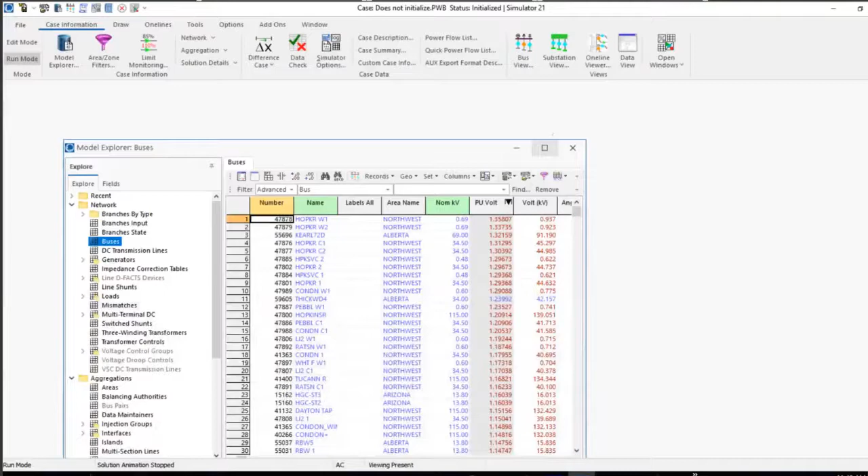This is what can happen. And let's just discuss, what do you do if we get this? What are the first steps that people do? For those of you who are just starting out with this, and you get tasked with running a system impact study-ish thing for some customer who wants to throw a generator on your 500 kV, you get a TS case. What's something that all of us do initially? Can you name off a couple of things that you have learned in your experience that you should do before you actually get into the guts of running a study?

So yeah, flat run, right? What is it? Who said that? What is that? 10 points.

What's that? No disturbance. Run it with no disturbance to make sure there's not things that are way out of limits or just bad, something that causes a wiggle. And then you've got to net out a bunch of generators that don't have models, and now I know there's a dashboard for this.

Right. So you run a flat line. You define a contingency with nothing in it, and you start it, and you plot some stuff. And what you want to see is just flat, and what you'll sometimes see is not that. So like Tom was saying yesterday, we all start ours at a second. I think Grid started theirs at like -1 second, and then they would kick the transient off at 0, right? I never understood.

Which was different, but it still gives you a second of a gap, which is also really best practice. Make sure you put a second or so before your fault so you can see, did this case have any issues before you got started, right? Another thing when you do a flat line is sometimes you'll get plots that are crazy, I won't show it here, because PowerWorld auto scales.

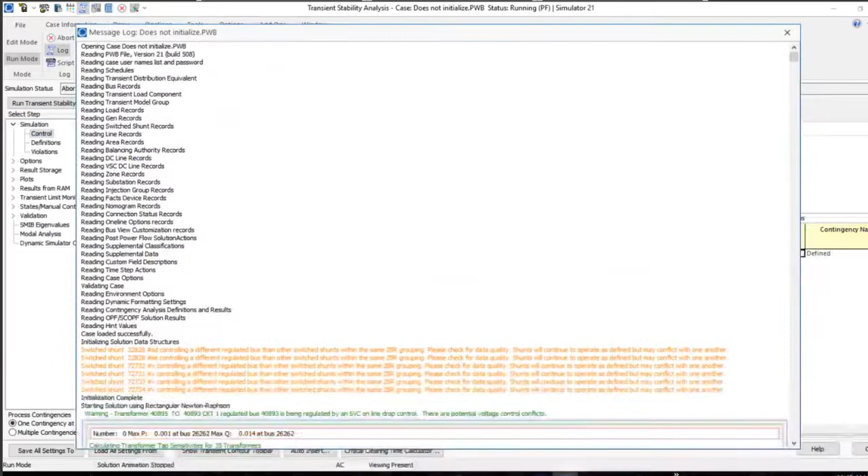But in the log, I'm a big fan of the log. You should become big fans of the log. You don't get a whole lot, I'll make that bigger, other than it was really unhappy. On the status bar, I don't know why these are sometimes disconnected, but they are. Sometimes these don't show up in the log.

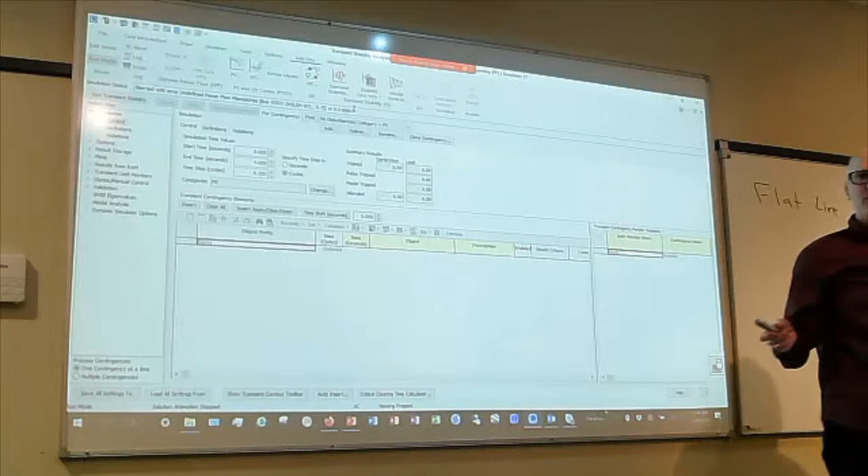This text. Correct, that won't necessarily show. So if you've not paid attention to this little bar up here, for this particular case, this is where the action is, because it's not in the log. Even though it's all been validated and run, the case won't initialize, there's something funny with this case. So if you had this, what would you do? Experienced planners, what might you do?

Yeah, go to the bus, right? Let's go. So wind turbine. Well, it's Wild Horse, right? Anybody ever had Wild Horse freak a case out? Okay. Honest to God, it's happened more than once. There's a wind plant on the line in Montana.

What is that? No disrespect to, where's the camera? No disrespect to you guys, but Glacier Wind. There's a wind plant called Glacier Wind, and gosh dang it, that model, for whatever reason, can unzip a WECC case. Like it can punt Alberta, we've had that thing just freak out.

And as planners, I don't know what to do with those parameters, so I just disable the whole model. Right? That's what I can do. Because me going in there and changing it, let's say their inertia is just some mad number. Well, I know what inertia is, but it's no better when I changed it than it was in the first place, to be honest. So there's nothing wrong with punting that stuff. But this one's a good one, because this actually happens. So 42372, let's mosey on over.

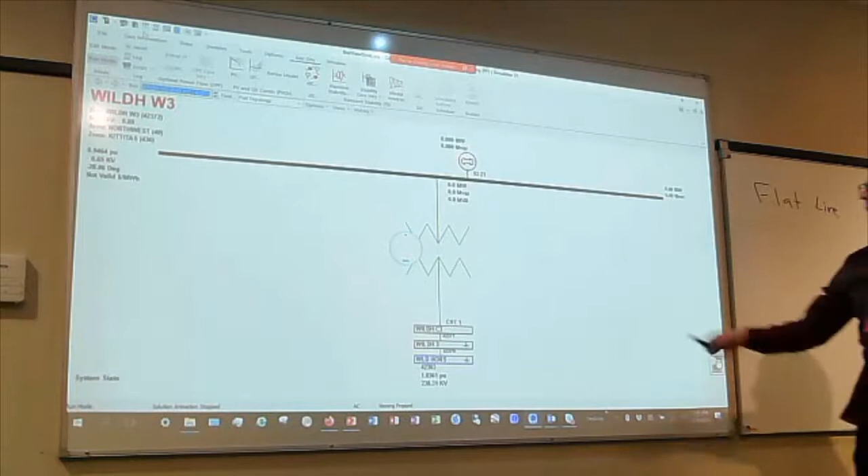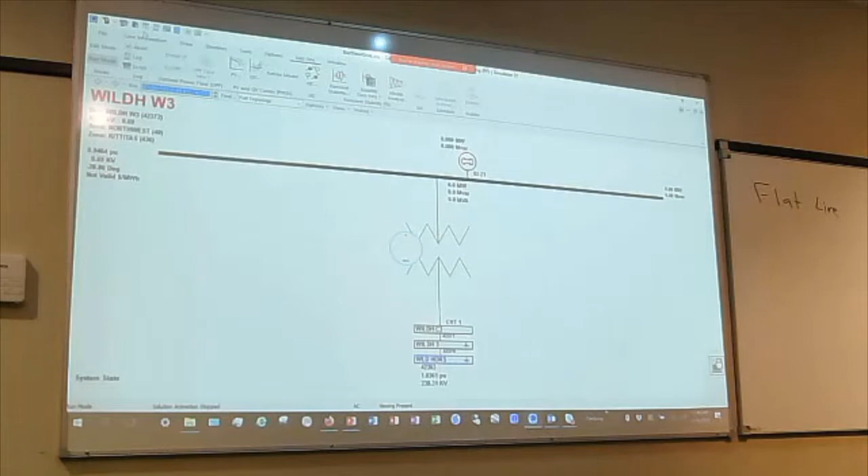So I've learned this is sometimes bad, that a generator is online and it's sitting at 0, right? The software should catch this if it's a problem. I'm gonna write this down. You're right, it could cause numerical problems. Well, that happens, and as you go, you'll learn this stuff.

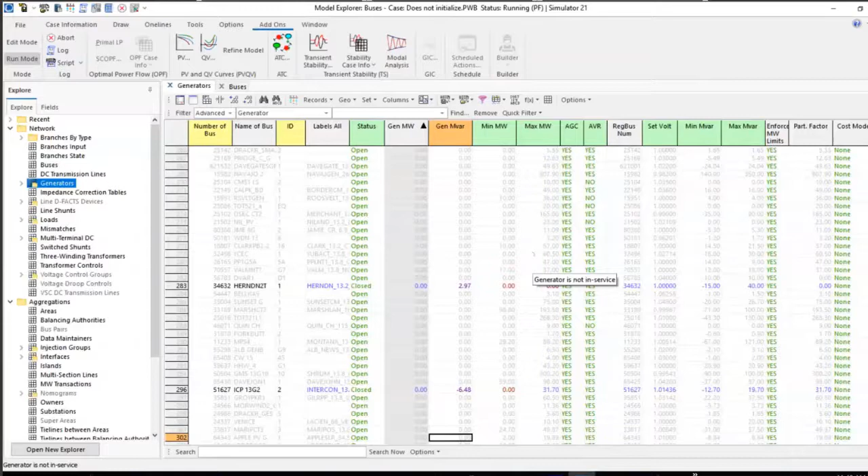We go to generators, we go sort on megawatt, and if we get out of the whole open area, there's a number that are at 0 and that are on. Now, the software people, why is that a big deal? It's a big deal in this case because this is the problem. Go ahead. The not-a-number stuff can happen in the numerical calculation. Something ends up being 0 divided by 0, and that's probably what's going on.

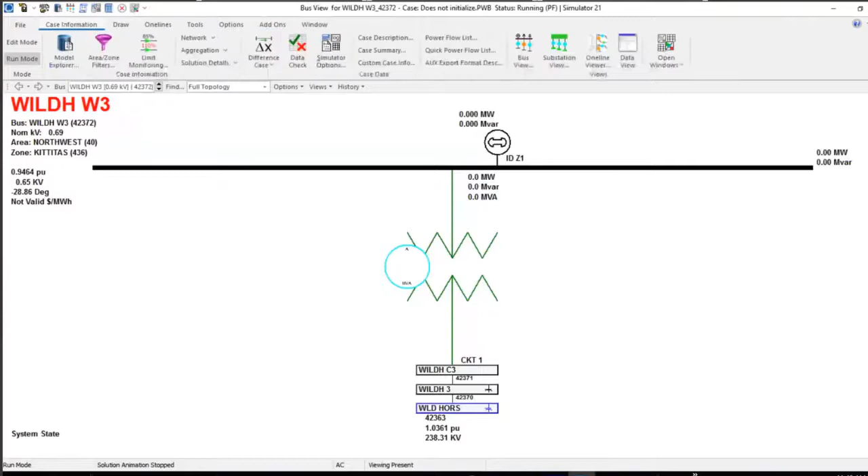It's a bug in the software ultimately. So send me this case and hopefully we'll handle it more gracefully. But that's the kind of error where you get undefined power mismatch. That's what's going on. But what if it was a synchronous condenser? Well, it wouldn't normally be at, I mean, the point is we need to capture. It's at 0 though. Would a synchronous condenser be at 0? Yeah, I think for power it would be 0, but it could generate VAR. So anyway, there's something in the equation.

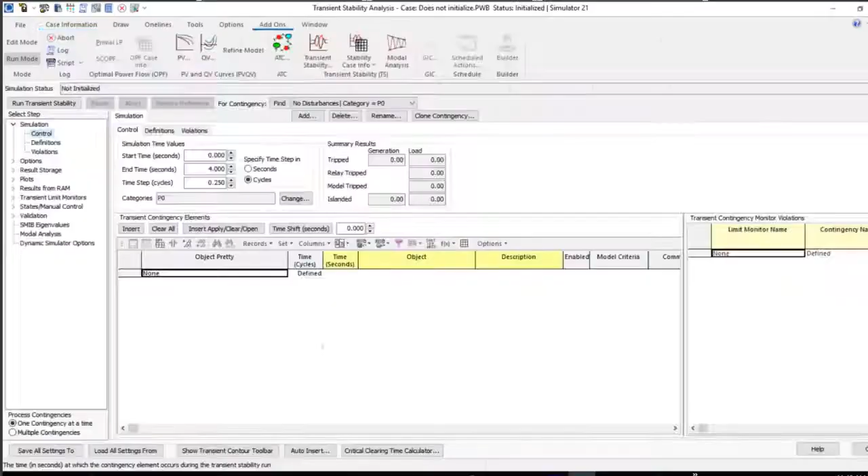So, 2021 Light Spring 1, that's the one that punted. So, what do you do? I would go look at the generator. I just wanna bring up another point: not just zero, but when we run transient on the real-time cases, condensing doesn't work either. You have to turn those models on. And there's a lot in the real-time cases where there's zero connected, and that'll cause problems.

In the case of light spring, could the wind be blowing? It could, but as a planner, I want to use this case. This is a public approved case, a WECC approved case. For this one, I would open up the generator and the feeder network and then close them in one at a time to see. One option is just open it, right? And then, good enough option.

And then we roll over to stability and try it again. And I think this one fails again, because all the Wild Horse is unhappy. Wild Horse wind plant. I think it's gonna punt, yeah. 42, 367. STATCOM model, the problem.

Jamie, I have a question. I'm kind of doing the same thing that he's doing, and I am grabbing some errors here. I have to go to the bus view and then type in the number. Is there a way to right-click and go to any bus? Unless you're in the case information, you can't. In an edit box like that, there's not. We could, but we'd have to code it on every little number edit box, whereas in the case interface, it's all kind of built in.

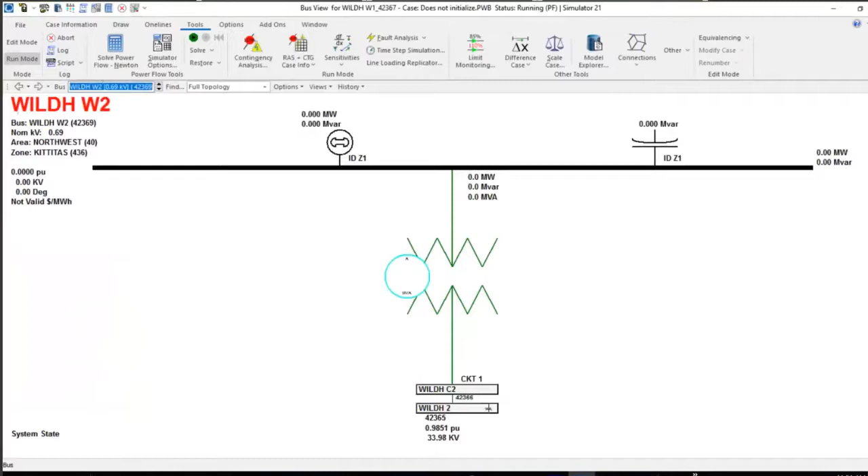369. So right now it's hopping around. All the Wild Horse issues, it looks like. So can you open that generator and show me what machine model is there? Open up. It's an induction motor model. And the cool thing is, this is not an old case, right? Can you initialize an induction motor at zero? It said it was built 2017.

Well, it's not terribly old. I would never use this case. Oh, no, I saved this case because in my time as a planner, I wish I would've saved all of them that I got from WECC. I looked back, I've had some issues with some cases, so I just pulled these ones, but these were published cases. It was published in 2017, but it was an honest-to-goodness case that was built for us to run studies on.

And sometimes it's a translation between GE and PowerWorld. I've had that happen. I had Simrit send me a couple cases, a coworker, she's at PG&E, that didn't work. They weren't well behaved in GE, and I loaded them up in PowerWorld, and they're well behaved. And I know that we learned a long time ago there was some initializing of some generator current that was done differently in GE and PowerWorld.

And initially, the folks at GE said, well, PowerWorld's doing it wrong. And I think you worked with some older gentleman at MVWG, and we found out they're different, but they're both legit. And in this particular instance, between GE and PowerWorld, one of them just refused to initialize. And you're the one sitting there doing this stuff.

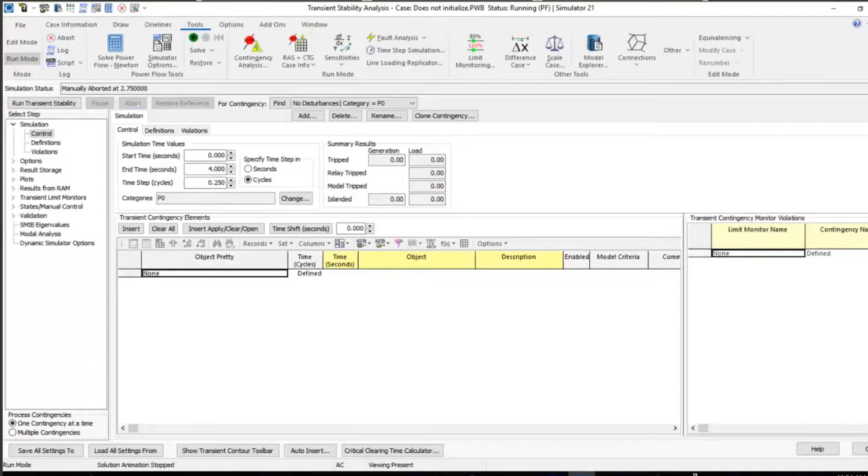Yeah. It is, okay. Because I think our grid modeling group has decided all the wind plants should be turned on at about 30% at a minimum, so that we can flatline test the cases and get these wind models better.

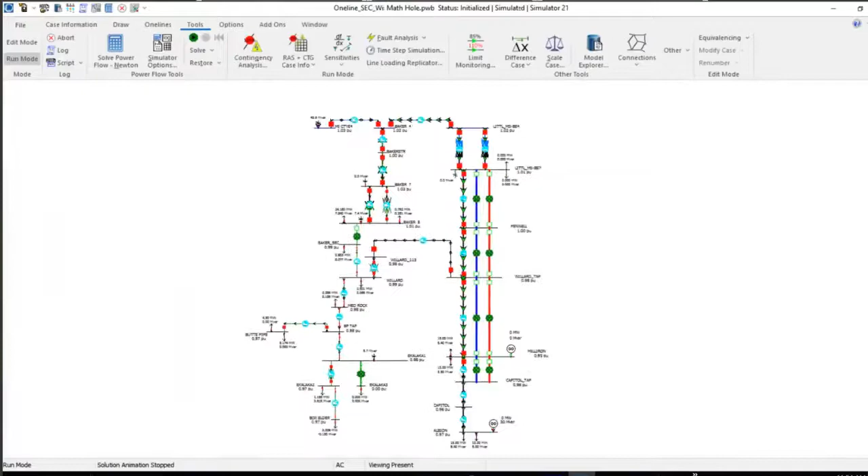Well, when in doubt, at least for me, I'm sure you have a lot of senior study people here that you can probably go to. I'm guessing that hopefully happens a lot, because good grief, in this room, you've likely seen everything as far as what a case can do. But I have found Mark at PowerWorld, he'll get my email, and he'll ship it off to somebody, and they'll help you out. If you've expended yourself on trying to get a dang case to function, I'm not saying blow up a bunch of emails, but they are quite helpful.

Yeah, I always tell our customers that a lot of our power engineering brethren are pretty passive people, most of us in this room. And most of you are afraid to bother me. And so you don't tell me when things are broken. So I tell you, for the sake of all those other people who will never email me, get us to fix it so that they don't have to be in the same boat as you. You know what I mean?

Support at powerworld.com is your good friend, or email Caroline or me. And you've met Caroline, she doesn't package anything. She's kind of direct, like, look, it hurts a little bit, but you get going.

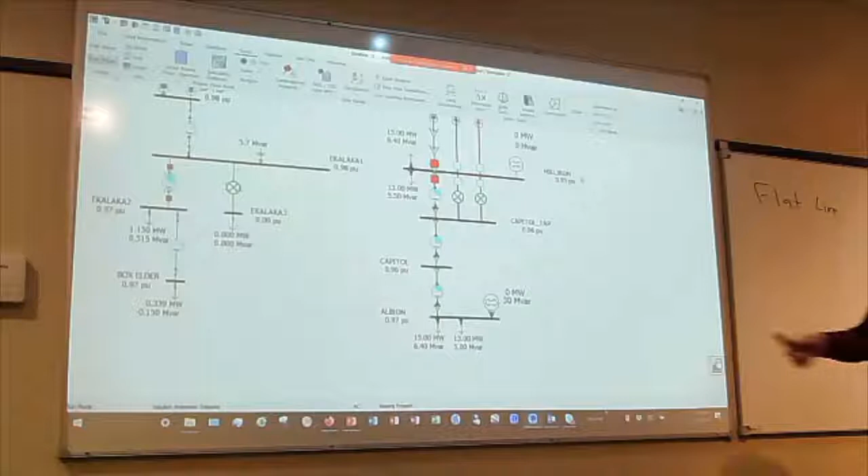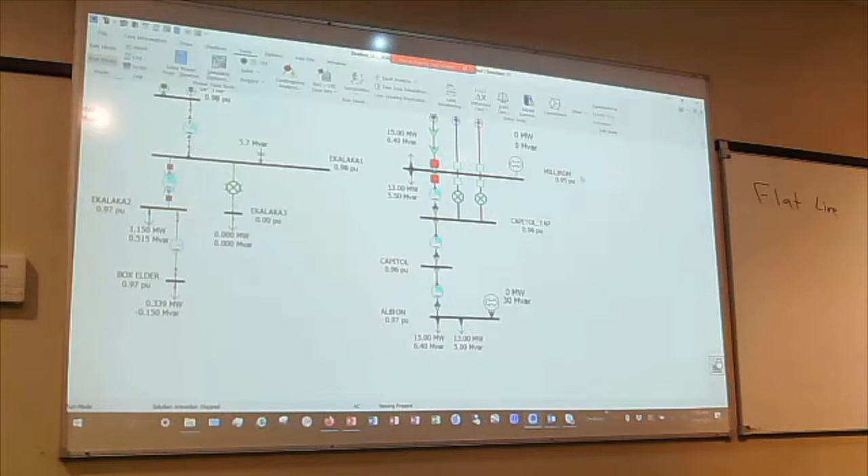Right, here's a funky one. This case worked one day and not the next, and I did send this one to PowerWorld. Sometimes when I'm lazy, I'll use a generator instead of a cap to figure out how much capacitance I need there. I mean, the QV curves are always short because the volts are always low, but maybe it's a bad practice. I did it this time because the client was trying to figure out the cheapest way to put a cap back.

So sometimes I'll just go to edit mode, and if you didn't know this, you can go to edit mode and drag this thing over here, and PowerWorld will say, hey, you want to move it? I'll say yeah. And this time I just put one of each, and it lost its mind. This one's kind of exciting, because I still don't know what the deal is here, but two things can happen. Let's look at the log, because this was a solving case until a moment, and I'm not doing anything weird here.

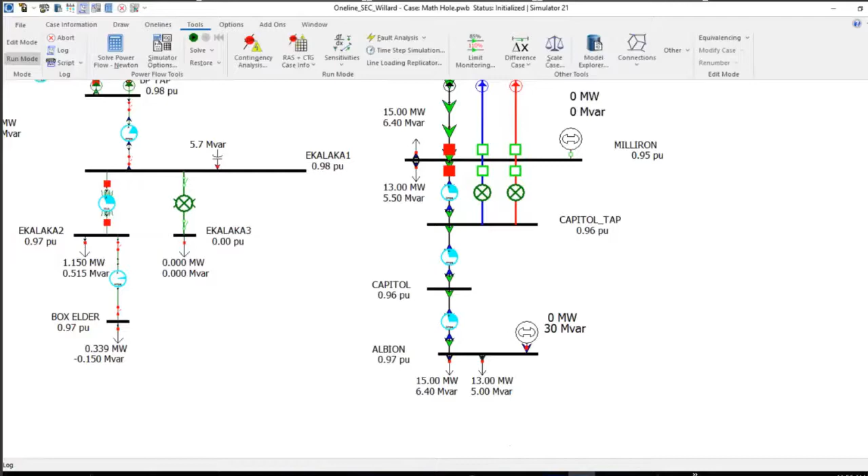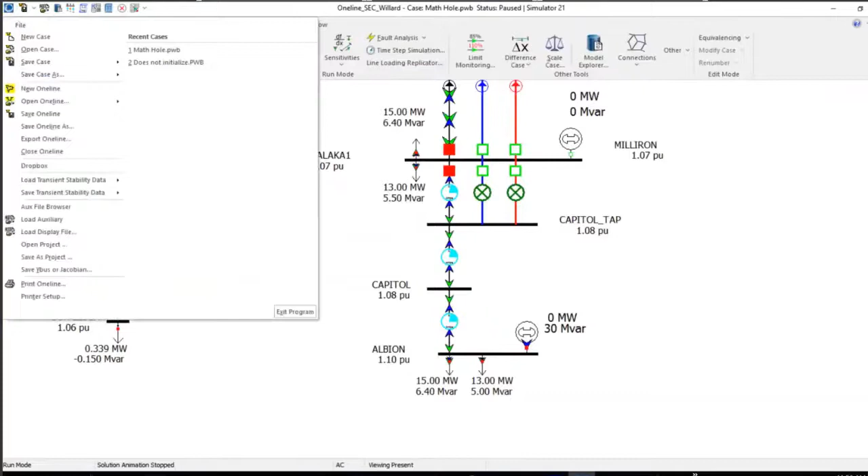Go to solve it, and, oh, for crying, there we go. It will progressively get worse, okay? To the point where the power flow did not converge, right? So here's a good one. Just for our edification, we'll open this up again, simple thing, I'm gonna solve it once. Here's the tricky part: I'm gonna open this thing, because this is where the issue is.

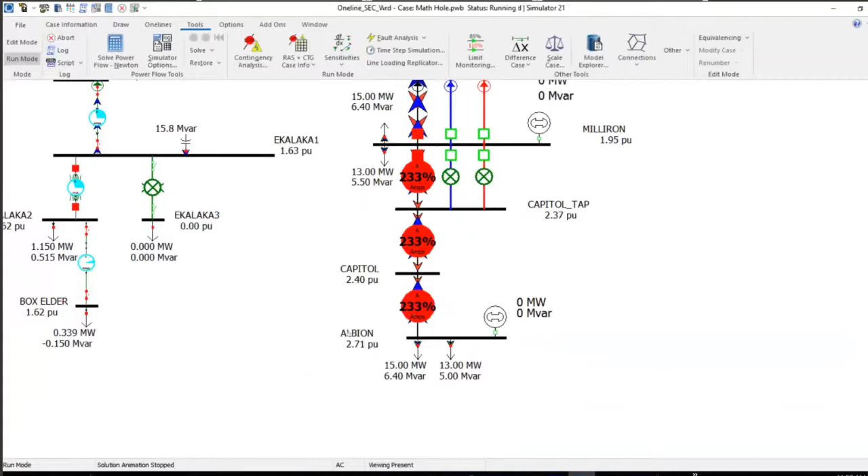And I'm gonna solve it, and all of a sudden, I get megawatts from nowhere, and a 2.7 per unit. Right? Hey, wait, send me that case. I was way confused about this one. Yeah, just send it to me, Colin. Right when you get done, as we go to lunch, send it to me, I'll look at it.

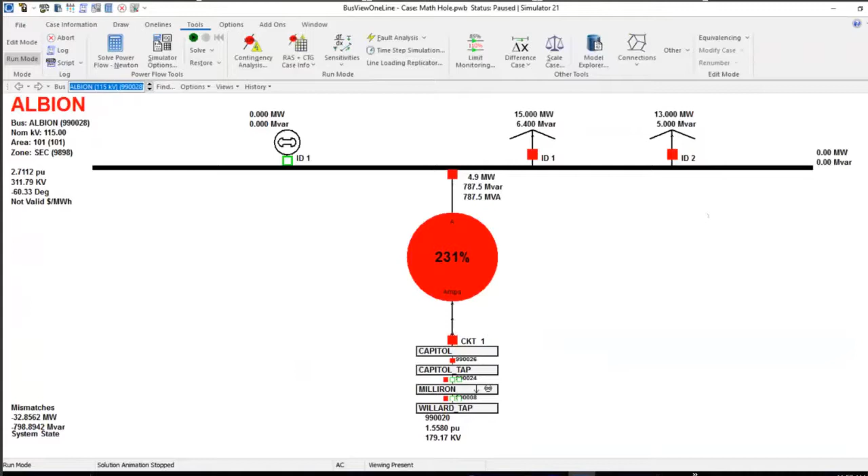Yeah. You'll get this, and that's why you save often. If you're new to studies and you make a change, save that case out as something else, because sometimes there's no way to get back. Like this version right here, I have tried something you can often do: you can go way up and open everything up, and then just try to bring it back, right?

But this particular line, I've never seen a QV curve with the bottom so close, it just has no reactive margin. So that could partially be it, but I couldn't get this back. I had to start over, because something happened so badly in the math that I couldn't get it to work enough to even get stability started. In a lot of our state estimator cases, when we pull one, take outages and solve, sometimes you just get tons of megawatts or vars going every which direction, it makes zero sense, and I just close it and start over.

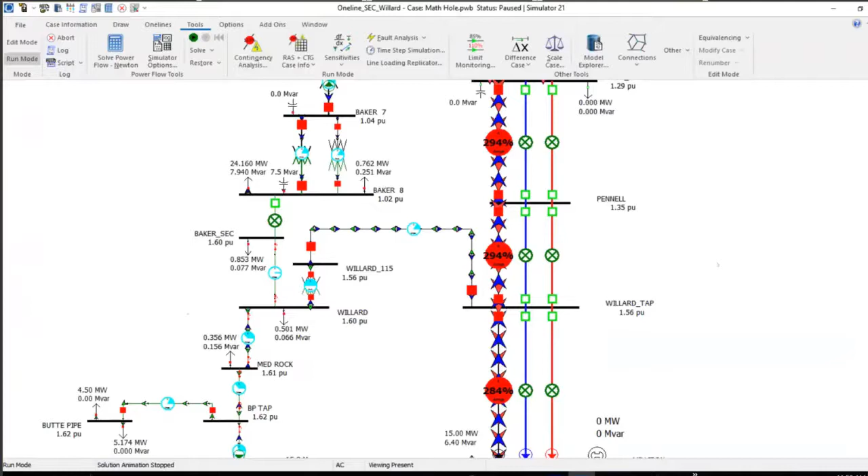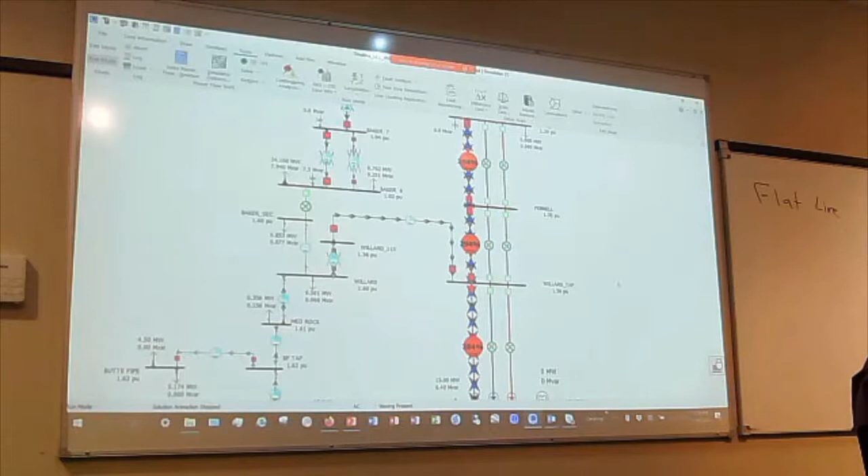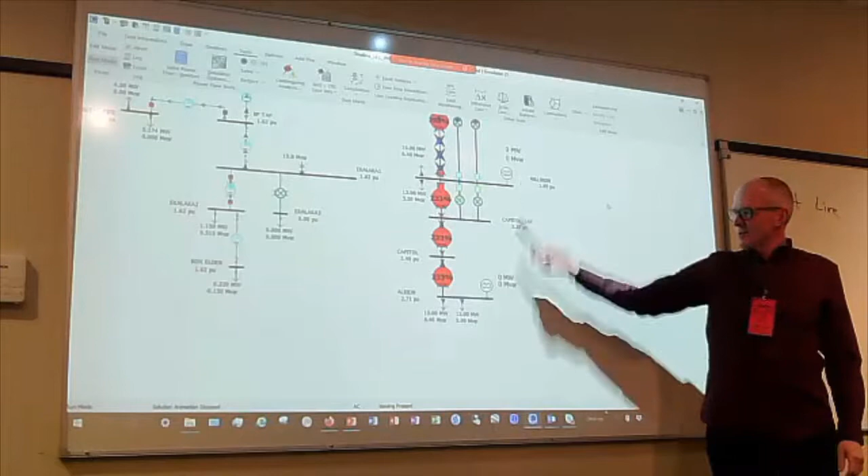Yeah, and I saved this one because I got a good one for someday. I didn't know why, and it could have been that I used this generator to regulate. That's why I was wondering what's the regulation. They were never both on at the same time. I would use this one to regulate this bus to 0.95 and see how that worked, then open this one up, turn this one on, use it to regulate to 0.95, and see who was needing more. And there could be a large impedance, but they were never on at the same time.

And then we get this where I turn them both off, and all of a sudden I'm getting magic megawatts. And this was also a published case. I'm like, well, gosh dang it. Now this is something I did. Granted, I added a generator there, but it seemed not so terrible. And you'll find that. So that's another way. We've saved cases before, not in this one.

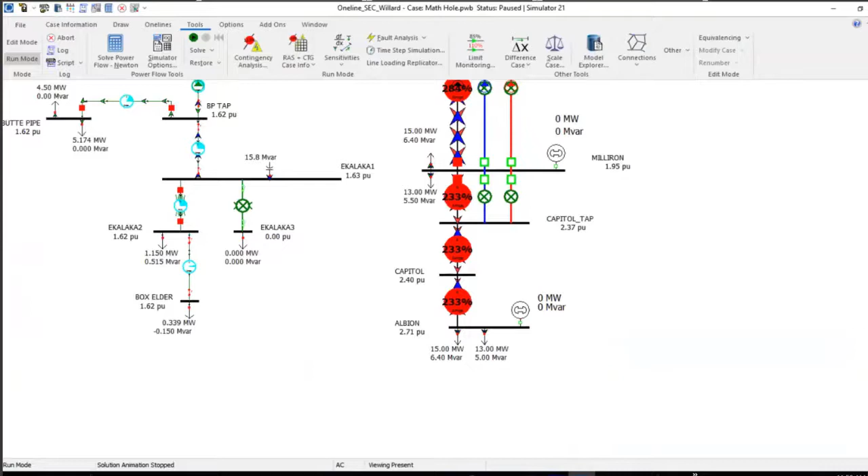Is this reporting a successful solution? No, it's, oh, okay. I don't know how to make that bigger. How do you make the log bigger? There's a font.

Yeah, just skip it, but it didn't converge. It hates this line. Oh, I've seen ones where they converge, but you have something crazy, like it converges at 0.2 per unit and is happy. Yeah, or the voltage is really high, or it's solved to a low voltage.

We'll get out of here right quick, but I wanted to make sure, let's see. I thought it was important that we do that load thing, because I was learning a lot there too.

Status line, case of WECC data check. Anyone ever use WECC data check? Handy aux file. So if you have a case, it's a bit like the SAD metric that Lucas was talking about, but it's available here in the tool.

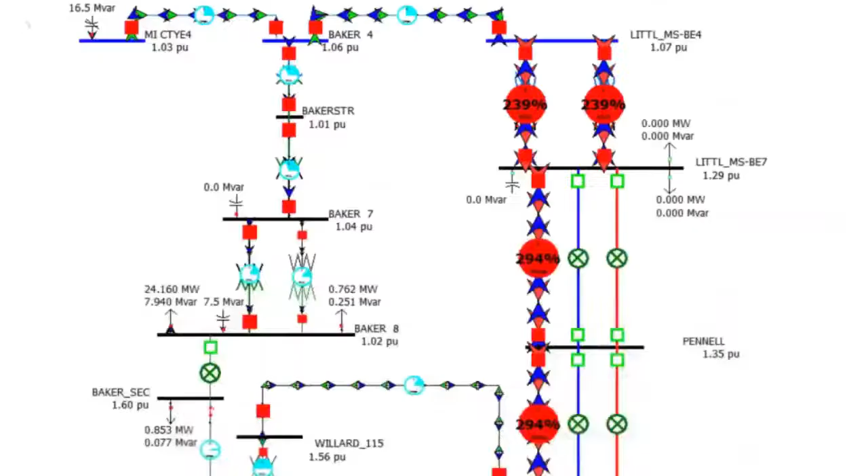So I don't know if it's going to work in this case, but if you go to case information, this guy, and you roll over here and hit data check, this may have it in it already, but I have an AUX file that says, I don't have it here. So let's load an AUX file. And I don't know if this thing's available everywhere, or

is this, where is my WECC data checks thing? Is that? I don't think I put that in there, no. It's on PowerWorld's knowledge base, if you look up data check. We're at lunch. I'll get you this after lunch.

There's a way you can, it looks a bit like what Lucas was, but you can have it in the tool and you can find out what transient stability parameters does this case hate right now, and it's all in a handy spot for you. Let's pull this one up. And then we'll do 5 minutes over here.

I'm curious, is anybody familiar with the transient stability manual that Bo wrote for Columbia Grid a couple years ago? You should, if you're fairly new to studies, it's a pretty nice document. It's available still on the web while Grid's still alive, but just search on Columbia Grid Transient Stability Manual,

and you'll get this manual that Bo put together, and there's some information in there about what do you do when a case just loses its mind. And there's some really helpful steps in there. One of the things that Bo does is he does that awful thing of aborting if there's anything limit violating. But I think Bo knows what some of those parameters are; I have no idea what those parameters are.

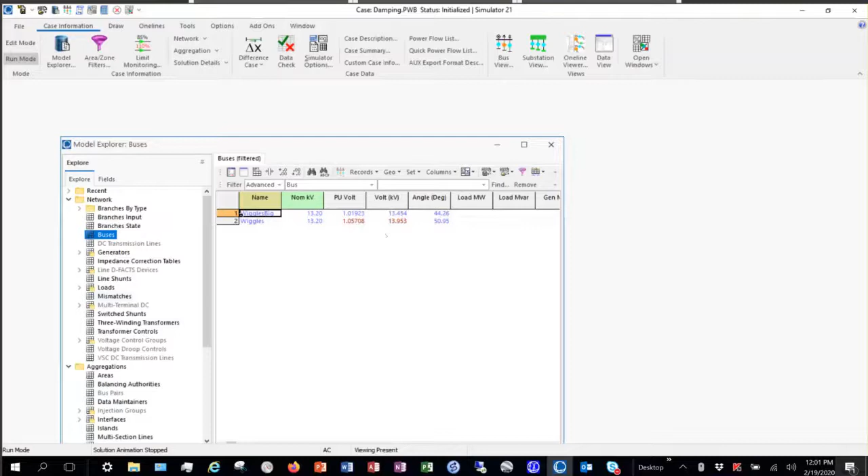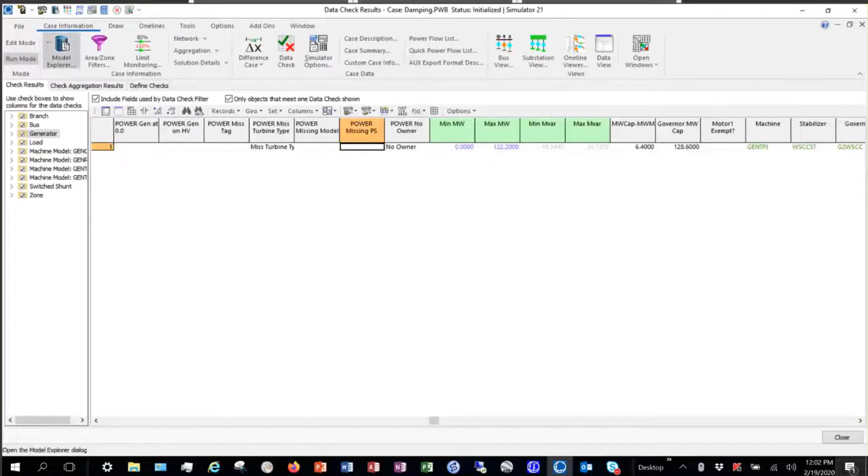I know Pmax, and I can fix some Pmaxes, but let me see if I can get this one to give us that data check. Real quick, just so you get a look at what this looks like. Yeah, so there's, it's a huge, you can look for a whole bunch, oh, I think I have it filtered. Sorry, 1 second. Let me turn them all on. Let's go back to this.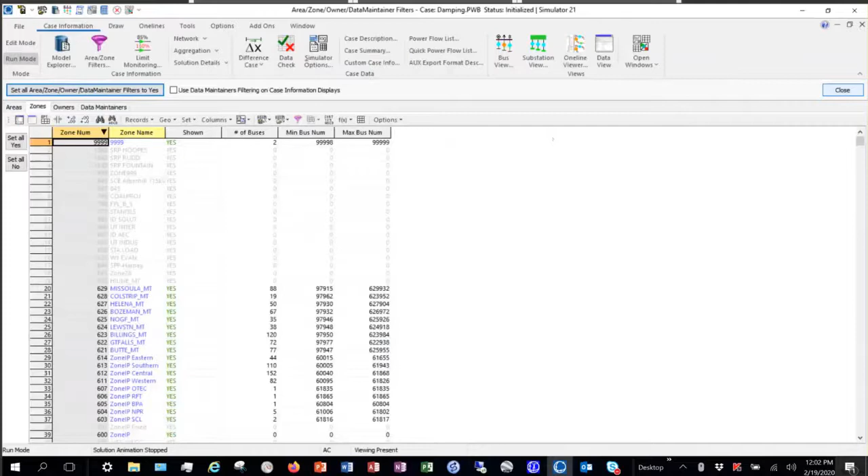So over here is what facilities do you want? Again, it's very similar to what Lucas showed you, but you can do it on your own. And I don't know who wrote that WEC aux file, but I can make it available because it's just an aux file. Okay. And so- I took the SAD Excel sheet and. There's some good stuff in here that would sometimes point you to an area of bad news.

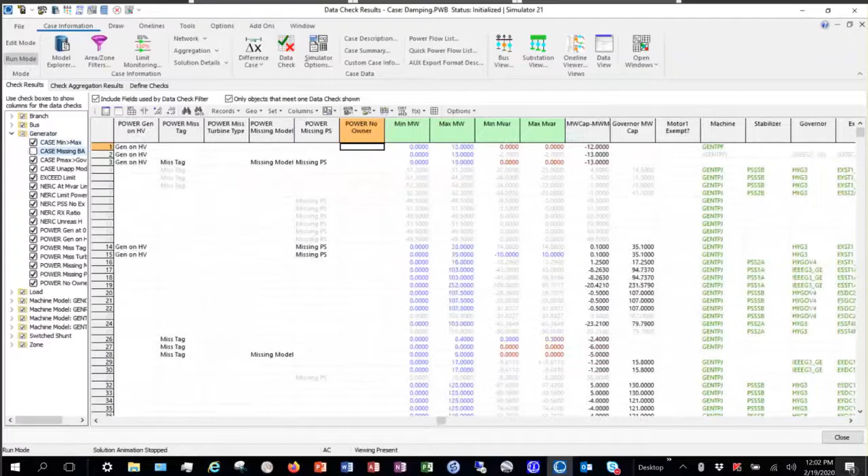And you can scroll through here and it will give you an idea of those TS issues, like the megawatts out is bigger than what you had in TS for Pmax. If you look at the generator, if you drop down, so let's uncheck all this. Which one did this one have? So here's one where Pmax is bigger than the megawatt cap

of the turbine. And that's bad for initialization? It could be. It's not necessarily wrong, but it just might be. Yeah. So we'll get that aux file out there somehow, which can be useful. It's another step that you can, when you're pulling, I can't pull any hair out, I got none left, so I want to get to this solution quickly. And that's been helpful.

We're going to skip this one. This was, oddly enough, what is this case? This one is, so last summer, 2019 Heavy Summer 3, there's a Wanapum unit, one of a number that refuses to damp. And I saved that case because I used the 2-bus thing, the SMIB 2-bus thing, just to see. I don't know what those parameters are, but Grant wanted to know why is this thing not going away?

And I know those units are frisky sometimes, but the parameters on that one, for example, you add the exciter and it gets worse. So I just played with models. It's got all the things modeled, and I took it down to the machine, and I expected the machine to go and stay undamped, and it did. And I think when you add an exciter, something's supposed to happen. It got horrible. Turn the exciter off, add the governor, things get better.

So what do you tell the person? Which standard should the planner ask for to check those parameters? Anybody know? Because all those model parameters come from somewhere, right? Where are those model parameters? Machine, governor, exciter. What NERC standards? MOD-26 and 27. Yeah, the MOD standards. So every 5, now 10 years, that's supposed to be where I got that data from.

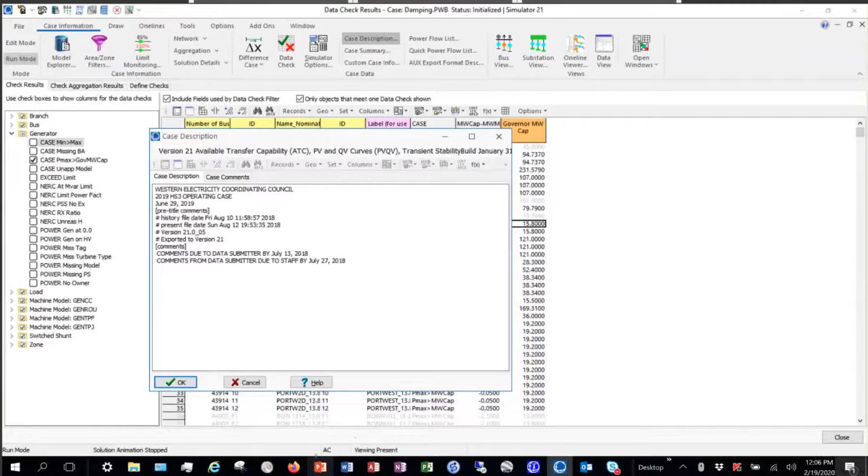Let's see, let's get out of here for some lunch. Status stuff, we're not gonna do that one. I had some notes, gen dialogue, model in use, generator. We can go through it after lunch. Going through this SMIB would be good to show people. Go to the SMIB? That'd be good. Yeah. All right, well, this case, let me see if I still have it.

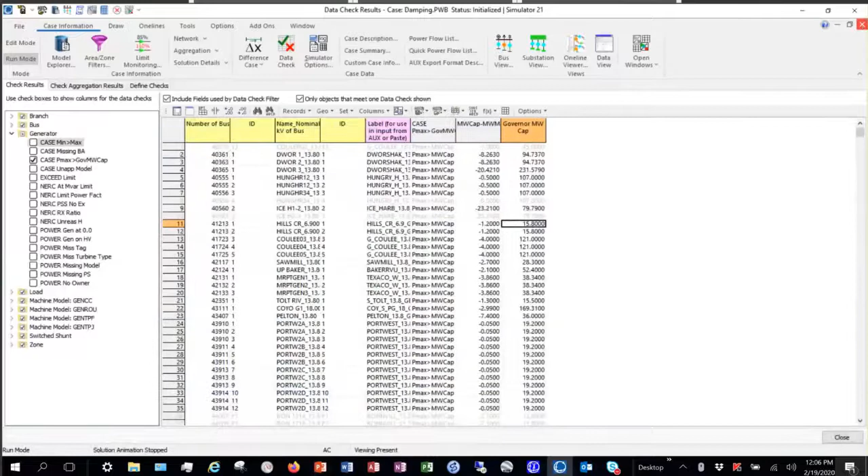So this was the case where the thing kept ringing, and it was during an annual assessment, right? You run this stuff to check damping. I don't know what Bonneville's methodology to prove positive damping is. Do you have a defined methodology? I mean, PJM, they have a calculation. At Avista, I print JPEGs, and I do this, right? The standard says the power has to be damped. I think it's a WECC criteria that says positive damping for generator power.

So in the assessment, I'll plot out all the power stuff, get a coffee, and go through the JPEGs. It seems kind of cloddish, but I don't have time to calculate. So, Tom and I will have some discussion of that later. Oh, brilliant. This is all automated. Well, it's getting there. I got really good tools now.

But maybe he likes that part. He didn't want it automated. I like coffee, that's right. Right. Yeah.

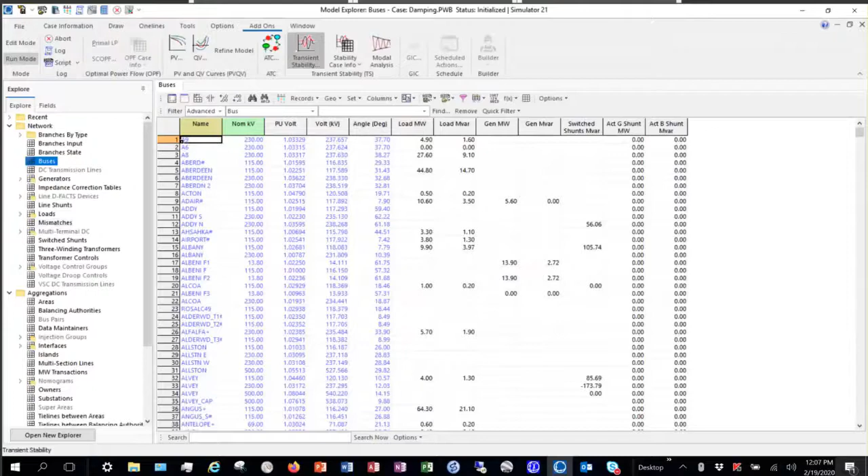No, Richard, we can do it after lunch. I want you to go through this. Okay, so we'll do it. Definitely. We'll go to lunch and then we'll just take 10 minutes to go through what you might do, or how you might direct generation to look into something using the 2-bus model. Cool.